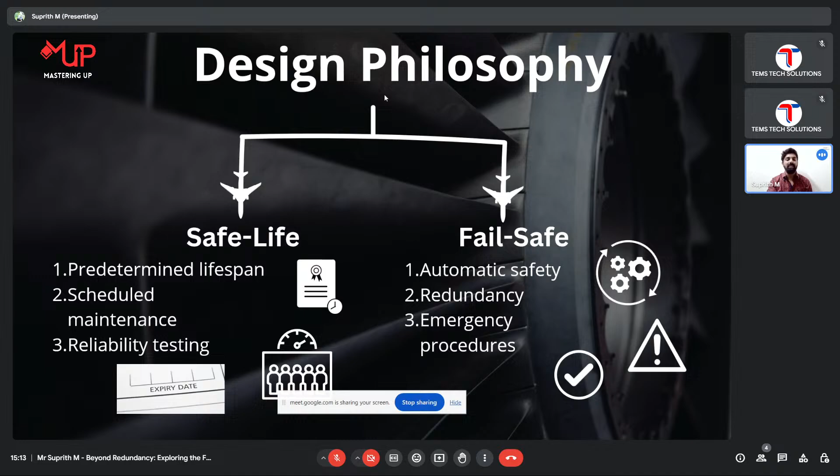Going to the structure, the primary thing of any component, automobile or aircraft is the structural components. So coming to structural components, you have to have a chassis. If you see a car, you will have a chassis. On the chassis, we bond everything—engine, seats, all those things come on the chassis. So you have to have a redundant chassis first of all.

In the chassis, if you take structures, most structure students attending these sessions might know about determinate structures and indeterminate structures. Preliminarily, determinate is something which is stable. Whatever automobiles we use, bridges, and other structural components and buildings you see—those are all stable structures, meaning they will be stable even without needing other equations to solve; normal equilibrium equations are enough to derive all equations on the structure. Whereas indeterminate structure is what we use in aircraft structural components, where we have redundancy in the structures.

Why are we keeping that redundancy? As I told you earlier, suppose you have an indeterminate truss and a determinate truss, where the extra member acts as a backup. Those indeterminate structures generally are not stable. What happens is, if one member fails, the indeterminate structure becomes stable by becoming a determinate structure. That is how it plays a vital role.

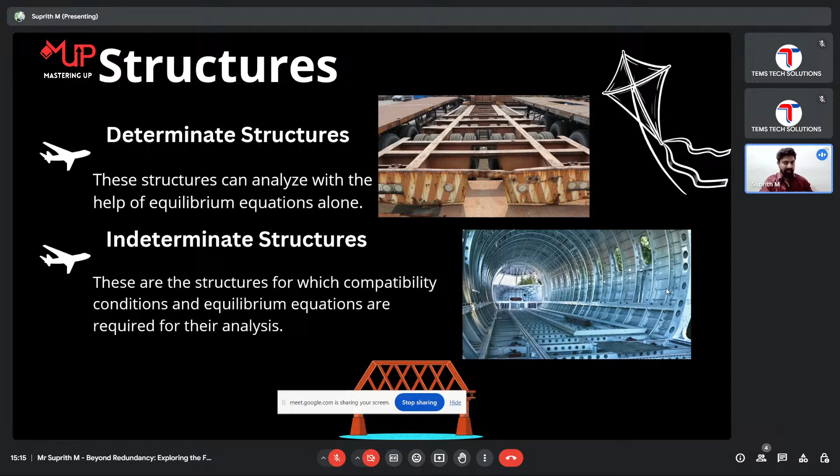Suppose so many longerons are running here, and so many stringers are running over here, so if one component fails, it won't let the next component fail. That is what fail-safe actually means working in the structures. So structurally, the aircraft wing, aircraft fuselage, or even a landing gear mounting, all those things are designed such that even if something fails, it won't let the neighboring parts fail.

Coming to redundancy, as I told you, redundancy is like extra power or extra backup that we keep in the aircraft. In aircraft design, commercial airlines generally have multiple engines. Private aircraft will also have multiple engines. In some cases, they will have a single engine with dual hydraulic systems. These are just redundancy parts, the general parts.

Apart from that, there are further subdivisions. You can go to n number of parts where something acts as a backup. We can list many such cases in aerospace, because most things are backed up in aerospace. Coming to electrical systems, again we have so many backup things. Suppose if one thing fails, another thing starts working. So that is what general redundancy is.

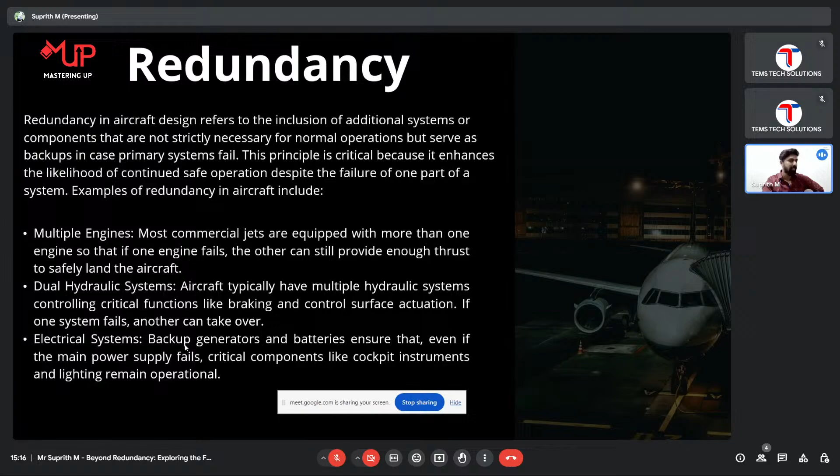Coming to aircraft system redundancy, I won't go much deeper into the concept, I'll just brief it up in general aircraft design. Here you can see this is the maintenance manual of Boeing 777. You can see there are three actuators actually. Generally we need only one actuator to move the rudder.

But in this case, you can see the rudder over here, and we need to move that rudder. Most of you are aware of why we use the rudder to move the aircraft in a yawing position. This is the rudder part, a control surface, so if you move this rudder, the aircraft will have a yawing movement. For that, we have three actuators there.

Generally, if one fails, the second one comes into activation. Suppose the second one fails too, and the third one, which is a very rare case, activates. Let's say the first one failed, the second one came in and maintained the position, then the second one fails too, and with some other problems the third one also fails. So all of them failed, and the rudder has tilted, let's say, to the left.

So what happens if the rudder is tilted to the left? Your aircraft will be yawing towards the right. So now what can we do? Suppose all three actuators have failed - do you think the aircraft will only yaw towards the right with no control and fail? Definitely no, it won't fail. Even in this condition, when all three actuators fail, there are still chances of coming to the ground safely, and I will explain how that happens.

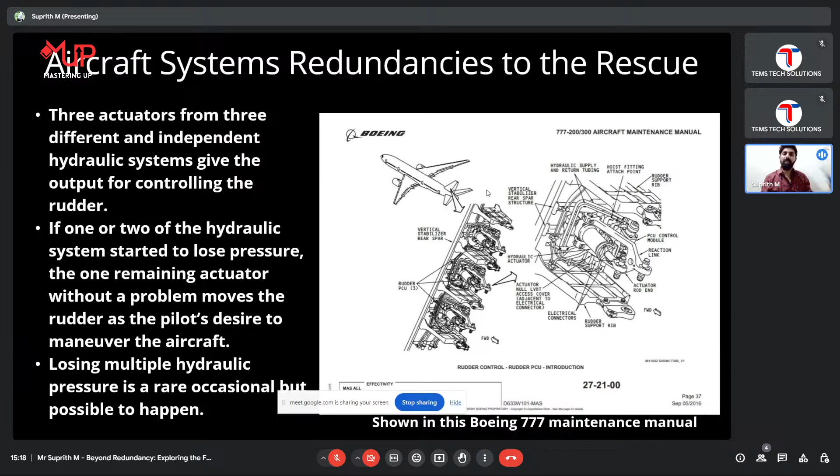Generally, as I told you, most of you are not aware of how things work on the control surfaces. These are the control surfaces - ailerons, which help in roll, elevator, which helps in pitching moment, and rudder, which helps in the yawing moment. These are the primary aircraft structures where we give more importance, because something with mechanical movement usually fails.

That is what happened if you see in mobile eras recently - like a year or two back we got pop-up camera cell phones, but it did not go well in the market for a few days, because whenever there is a mechanical system, there will be a failure.

So whenever there is a failure, you should always have a backup. Whenever something is moving, so many components are integrated in that, so there are chances of failure. So how do you come up with a new idea? Whenever something fails, you have to have a backup. So that backup, we have it in the aircraft design.

Before manufacturing, we have pre-designed it in such a way - there are so many conditions, we don't know exactly what will happen when you are in the air. So we have to keep backups in place before we send the flight airborne.

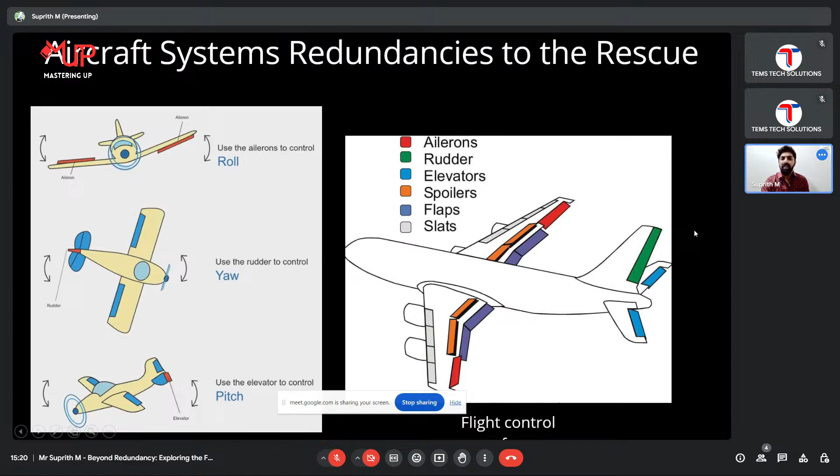Coming to the generator, aircraft generally have four generators mainly. That is the main generator - it's like whatever engines we are using here. These are the main generators.

But this main generator needs to be powered on using the auxiliary power unit, which we see in the tail portion of any aircraft. You might have seen some exhaust going out of the aircraft structure - that is our APU. APU is just like a normal jet engine, where it will power on first and start running as an engine, then generate power, and help with cabin air, AC, all those things, and it will power up the engines that we have.

Once the engines are on, these engines on the wings become the main generator for the entire aircraft, generating the power required for the entire aircraft. Electrical power, all those things, is taken from these wing engines. So APU takes care of a backup - it is again a backup.

Yeah, APU will be a backup. Once the aircraft is airborne, it will always be running as a backup, so whenever there is loss of an engine, APU will take care of it.

Apart from that, we have one small RAT - ram air turbine - here. This is small, but it is very crucial. I'll tell you why it's crucial - this may look small, but it has saved more than 40,000 lives in a year, because it has such an impact on aircraft design.

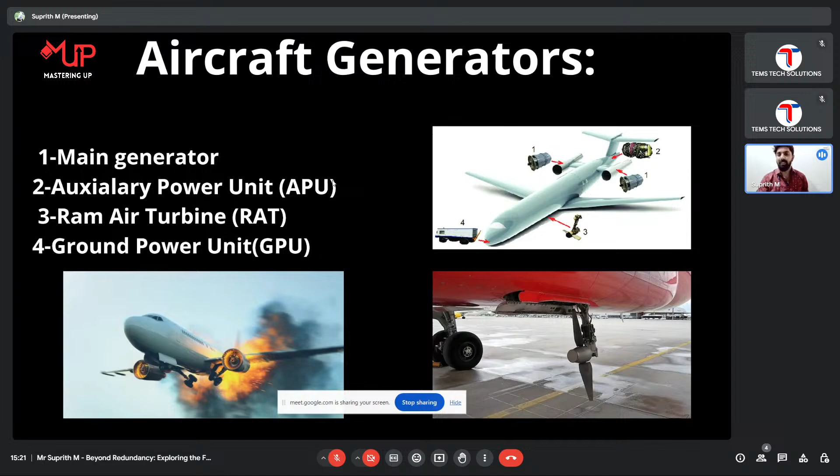Coming to the ram air turbine, it plays an important role in an aircraft. As I told earlier, let's say there's a situation where one engine fails and my aircraft is still stable. Suppose you take a Boeing 747, generally it has four engines. Out of four engines, let's say one right outermost engine has failed. I still have one more engine on the right and two more engines on the left.

So what happens? The thrust produced on the right becomes less. If it becomes less, the aircraft will start yawing towards the right, because the left thrust is more. So what can we do at that time?

I can reduce the thrust from the left so that it will still be stable and it can fly safely. So this is how things work. But who is going to do all these things? It's a pilot's job. The pilot will be trained in such a way that if something catastrophic like this happens in the air, he will have to monitor the engine thrust so that it will still be stable.

Let's say there are some situations where thousands of birds are flying in the air. All of a sudden the flight passes through those birds, all the engines are hit by the birds, and all four engines fail. So in such cases, what happens? Right now I don't have any thrust in any of the engines. The aircraft is airborne, let's say at almost 12,000 feet. So is it possible to land it back when all engines have failed?

Just imagine your car with engine failure. Can you get that car to the next garage without the help of a towing vehicle? Obviously no, because it will be seized, you cannot even move. You have to get a tow for your vehicle to the garage. Whereas in this case, it's not like that.

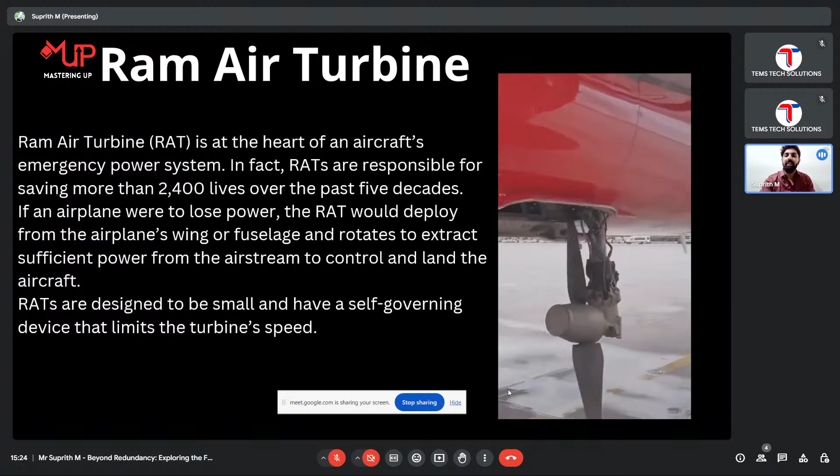Whatever electricity is required from those primary sources is more than enough for a pilot to land the airplane safely at the nearest airport. It's not like he can go to the destination, but he can land the aircraft at the nearest airport safely. So this is about when the engine fails.

Now, when an aircraft is airborne and flying at a certain altitude and speed, it will have a radar monitoring the entire air nearby for any aircraft coming. We have a system called TCAS, traffic collision avoidance system, built in, which keeps monitoring the air around it, so that if any other aircraft or bigger bodies are nearby, it will immediately tell the autopilot, or it can be monitored by the pilots. It passes the information that there are nearby aircraft.

What TCAS does is communicate between two aircraft. This is an automated system. TCAS will be in both aircraft; all commercial airlines have TCAS. It passes information to both aircraft: one aircraft is asked to climb, and the other is asked to descend. If it is in a TA region, generally it will take its own decision. If it's on autopilot, the autopilot will take care of it. One aircraft will climb, the other will descend, and they will pass without any collision.

But when it reaches the RA regions, they have to coordinate with air traffic control and ask whether the TCAS is true. If the TCAS is true, they have to ask air traffic control what the procedure is. The air traffic controller might say to climb or change position. So the collision can be avoided. This is what fail-safe is.

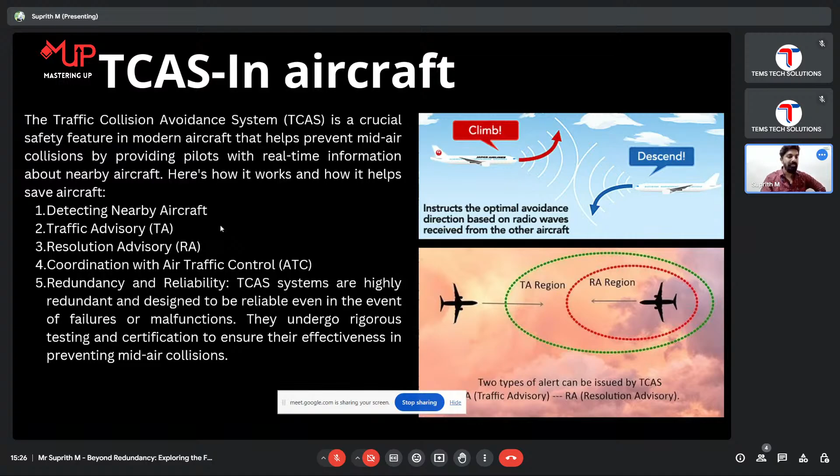And you can see I have three case studies here, which are miracles in aircraft design. One is a Boeing 737-200 carrying 89 passengers. You can see how exactly the structure failed in the air. This is what happened when the aircraft was in the air. Almost the whole fuselage structure flew off, but still the pilot managed to land it safely.

So you can imagine, suppose something failed like this, and still the pilot could land it safely. It means the redundancy in aircraft is truly amazing. It is so safe. If the pilot is skillful enough, the aircraft will cooperate with them.

And you can see where the elevator has been broken, but still, as I told you, how exactly we are going to handle it, I will explain in the next slide. Even after all this fail-safe design, if something fails, there are chances of still having a safe flight. We will see how we are going to do that, and what next steps in fail-safe design we are going to take.

So you can see the fighter jet with only half a wing, the other half is gone. Generally the wingspan of fighter jets will be very low, and you can imagine, even with half of it gone, the pilot still managed to bring it back to the ground.

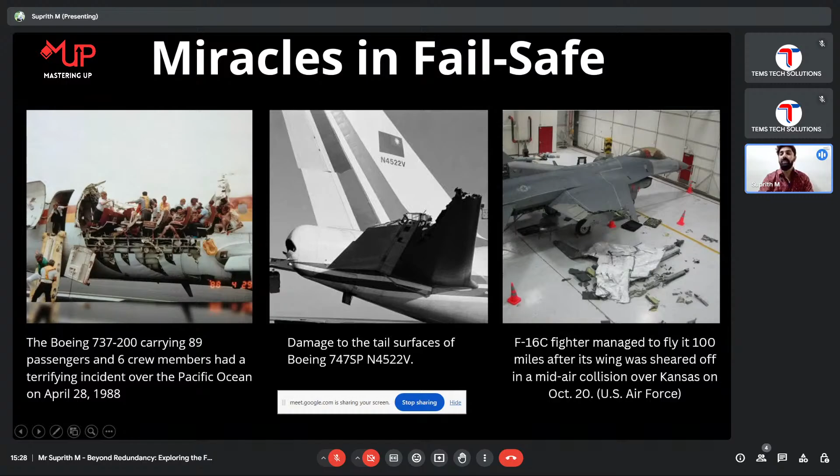So if you take a fighter aircraft, there also we have fail-safe. In commercial airlines, they will be carrying 200 plus people, so obviously safety is the top priority in commercial airlines. Whereas in a fighter aircraft, we have to compromise at certain stages on the aircraft structural stability or redundancy due to the structural load, weight, all those things.

But we have other features where it is safer for the pilots to eject and save their lives, because here the cost of the aircraft will of course be more, just like our commercial airlines, but the pilot's life is what matters. You might wonder, why can't we have this ejection seat in a commercial aircraft? But this procedure of ejection is not simple.

As I have mentioned here, ejection of the seat can take up to 20 Gs in certain conditions if it is flying at Mach 1. Right now we are at 1 G, so imagine 20 Gs of pressure on you at a time. You cannot withstand that pressure; sometimes you may even die. So these features we cannot include in a commercial aircraft. They can only be included and trained for fighter pilots.

And we have emergency procedures; recently even India has landed fighter aircraft on highways, where the runway is shorter and the aircraft has to stop within certain meters. These are safety features included in fighter aircraft: if some malfunction happens and there is no airport nearby, or the runway is not long enough for its capacity, we have backup parachutes or other braking systems to stop the aircraft within a certain distance.

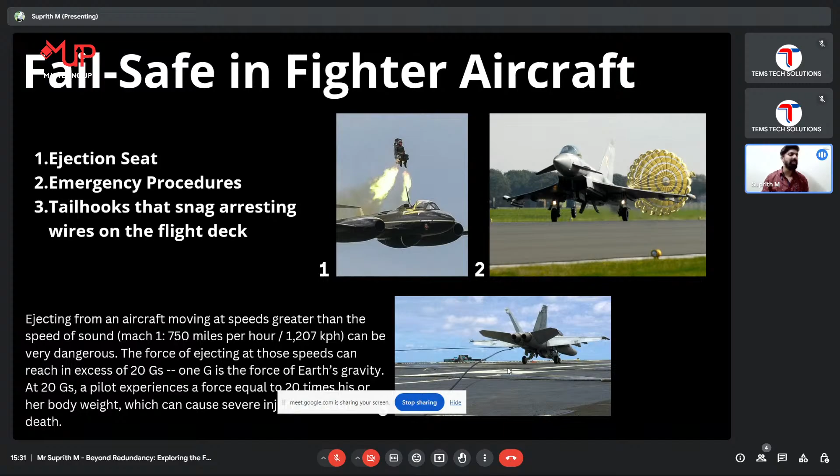So if that should not happen, he has to keep his thrust at the maximum, so that even if these three things did not catch, he can fly back, come around and re-land it. So all of this is a combination of pilot skill and the pure engineering behind all the components used in this.

As I was telling you, things can still be saved even after catastrophic failures in an aircraft, even after a series of failures of all the backup systems, and a pilot can still land the flight safely. That is through our flight simulators. This is a wonder of an engineering piece. The pilots will be trained in these simulators for n number of situations, various conditions and scenarios, and they will be trained and certified.

Of course, it is mandatory for pilots to get simulator certification every now and then to keep them active. Because in commercial airlines, the pilots generally take off, put everything in a stable manner and put the entire aircraft in autopilot. Then autopilot takes care of the flight for another 1 or 2 hours depending on the flight hours. Whenever he is approaching for landing, he switches off the autopilot, gains full control of the aircraft and lands.

We also have ILS, the instrument landing system, where even the landing and takeoff will be taken care of by the autopilot, at some airports. But generally the pilots are busy with these two tasks, takeoff and landing. So suppose while the autopilot is working some situation happens, like if the rudder or the elevator broke, how the pilots will react and how they will land it can be practiced with this flight simulator.

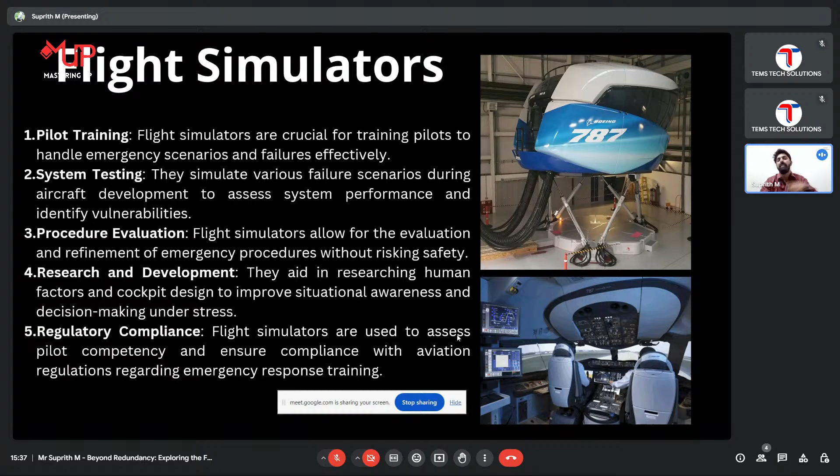And regulatory compliance, of course. They can seriously go for this training process, they can get certifications, so pilots can upgrade themselves with the latest things. So far I have discussed only the aircraft. Suppose if an aircraft fails, what are the things? If the engine fails, if the landing gear fails.

Coming to the landing gear, of course, even if both the landing gear don't extend when it is landing, in such cases, the pilots will again be trained to belly land. All those things are trained, so the flight is still stable to save lives.

So now coming to fail-safe in helicopters. Of course, in helicopters also most of the structural components are designed in a fail-safe manner. Even if some structure inside the chassis fails, it won't let the other structures fail. So it is still safe. Apart from that, we have a feature in helicopters.

In an aircraft, what happens when the aircraft is airborne? The major lifting device is our wing. So we can slow down while descending, we can achieve lift, and we can land it at the nearest airport. But a helicopter has VTOL capacity, right? Vertical takeoff and landing capacity. So if it is at a certain altitude and suddenly the engine fails, the helicopter is still safe enough to land. That procedure is called autorotation.

What happens in autorotation is, let's say the helicopter is flying at a certain altitude and suddenly the engine fails. The pilot has to adjust the rotor blades at such an angle that the rpm will be achieved by the backwash from the direction of flight. If you change the rotor, you can see here the airflow around the rotor blade will be changed, so that the rotor will start rotating. You might have played with many paper helicopters or plastic helicopters.

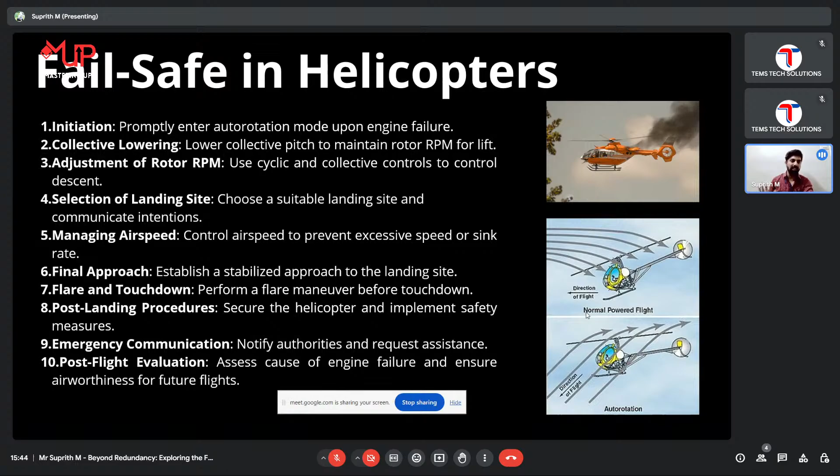We can go in depth, but it will be more and more complicated. Remember one thing: if it is safe, it's more complicated. The engineering is more complex so that things are safe. As I told you, if it is a normal truss, a stable truss, the calculation would be very easy and fair enough. But when you are implementing one redundant structure in that, you need to solve so many equations to get the answers on each individual member. So why are we making it more complex? To make it safer. So that is how things work.

So I would be open for any questions and answers from the audience as well. It would be great for an interaction. Yeah, thank you, sir. Thank you for the presentation. Hello, sir. Hello. Yeah, okay, sir. I have some questions here. Yeah, sure, sure.

So, how can fail-safe design principles be applied to the development of unmanned aerial vehicles to ensure safety in increasingly crowded skies? Yeah. See, even unmanned aerial vehicles are equipped with TCAS systems. This TCAS system will send signals to both the aircraft and the UAVs, so they will have communication. Whenever the aircraft is flying nearby, it will know this UAV is flying nearby, so it will send signals to the UAV so that the UAV will descend or climb. Usually it will descend, because we don't expect UAVs to climb as much as a commercial airliner, so it will be in lower ranges.

It will generally fly at lower altitudes compared to commercial aircraft. So they will have communication, and a control system as well. The UAV will have a control system which will be controlled from a chamber. So they will have this information and they will control it, descend it, and avoid the collision. As well, suppose something catastrophic happened in a UAV: nowadays we are working more on UAVs so that even if something fails, like the engine, there will be a parachute which will deploy and it will land safely.